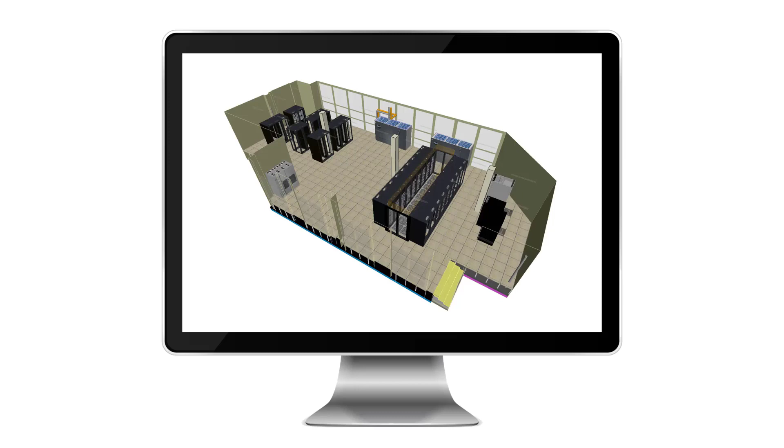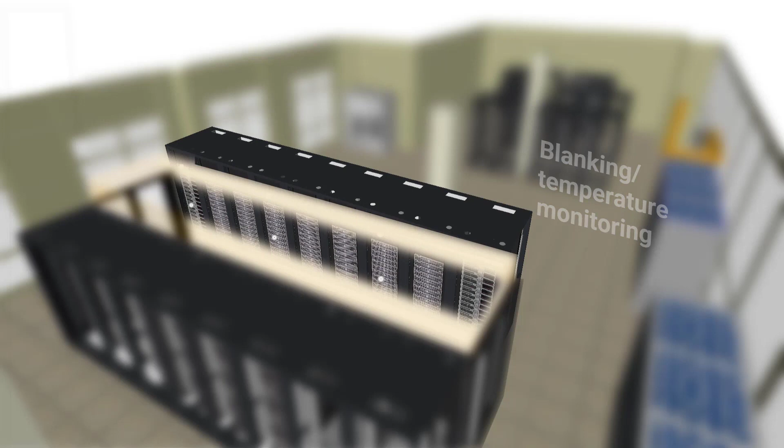This is a real data center from Binghamton University in New York that is part of a government and industry-funded research consortium called ES2. Future Facilities belongs to this consortium and has access to this data center to perform studies. It has a modern design with containment and monitoring and cooling system automation that was designed to maintain availability and efficient use of capacity resources at the same time.

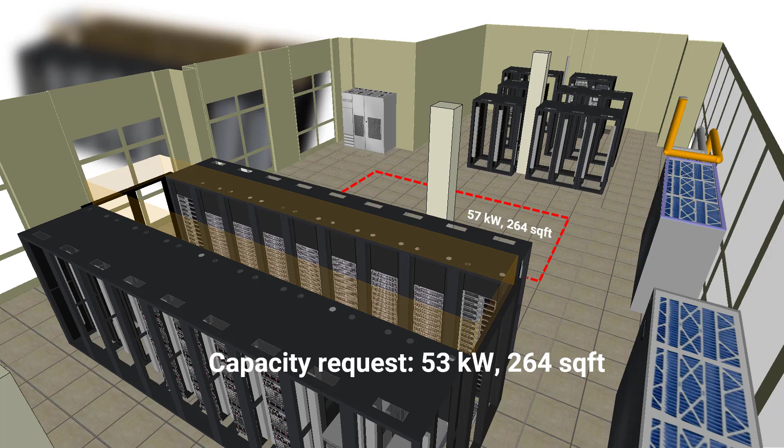In this example, a business unit wants to install a pod. The capacity requirements of this pod are within the data center's capacity ratings. On this basis, it was predicted that the pod could be installed without a problem, and the request was approved. After installation, 2 IT units in the adjacent aisle lost cooling capacity and set off their alarms. This behavioral change was overlooked by the prediction.

The methods used to predict performance missed this behavioral change, which led to an unexpected performance problem. The risk of a temperature-related failure increased even though the supply of cooling and airflow matched the demand from the IT equipment.

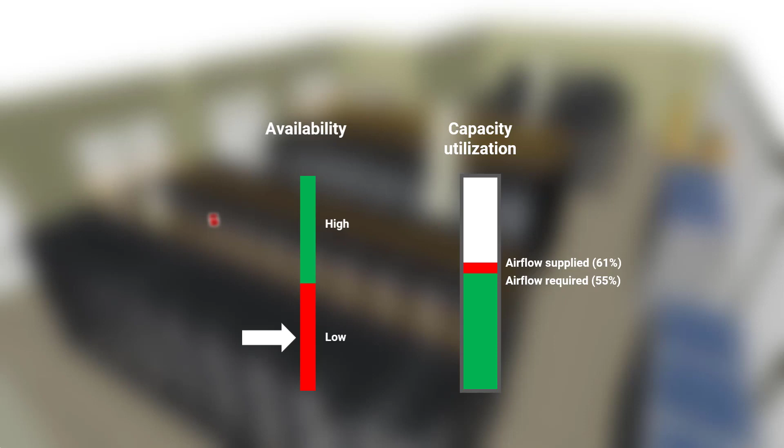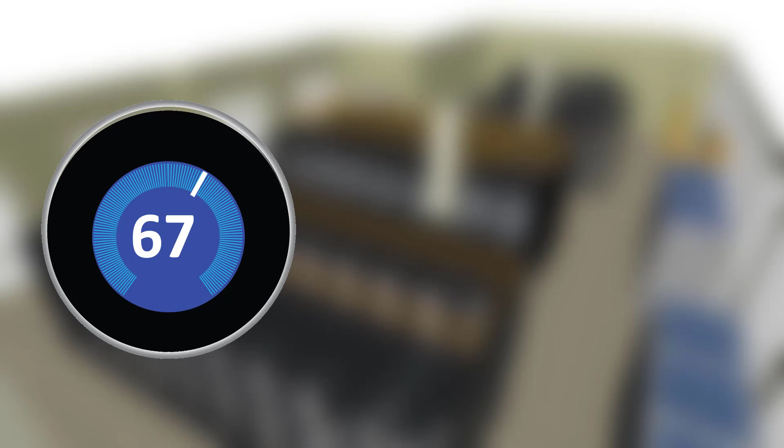The inability to predict data center behavior not only caused this problem, it also greatly limited the visibility of options to solve it. There was only one option the data center management team was certain would fix the problem, and this was to cool the whole room down until the alarm stopped.

So this approach eliminated the potential outage, but at the expense of capacity utilization. This configuration was using 95% of the available cooling to support an IT load that was only 55% of the available power. And this highlights the problem. Current tools and techniques lack the capabilities needed to account for data center behavior and performance.

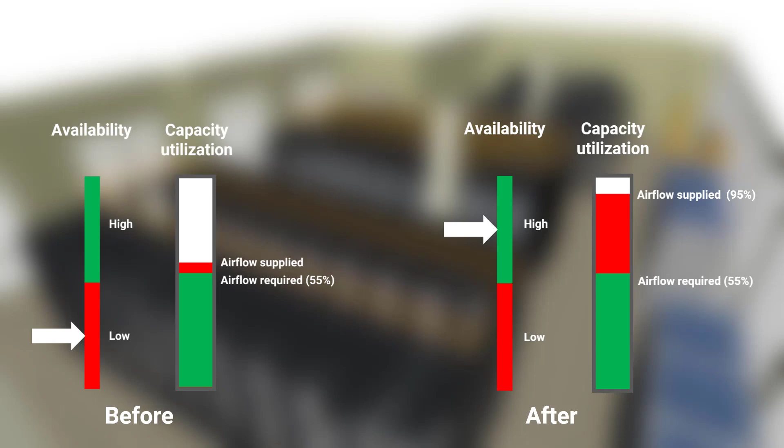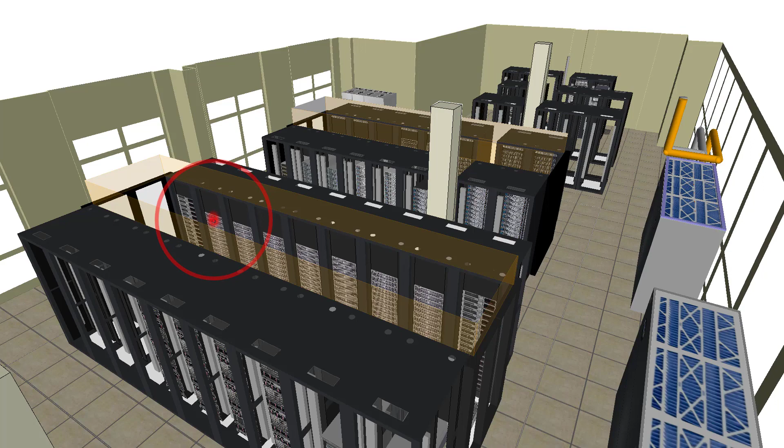Let's go back to the beginning and plan this change with a digital twin. First, let's return the cooling system to its original settings. This overheats the servers again. From this point, let's use Digital Twin to design a solution for this request. Digital Twin simulates the physical behavior that drives data center performance after the IT pod has been added. The simulation process returns a result in a few hours.

Here, we see that the Digital Twin simulation has identified the overheating servers. Without simulation, the only option for meeting the capacity needs of the servers was to provision more cooling capacity from the room. But with Digital Twin, the root cause is clear. This is a local airflow problem, not a room-level cooling problem. This problem can be solved without having to provision more cooling capacity. This can be seen more clearly by isolating the cabinets that are interacting with each other.

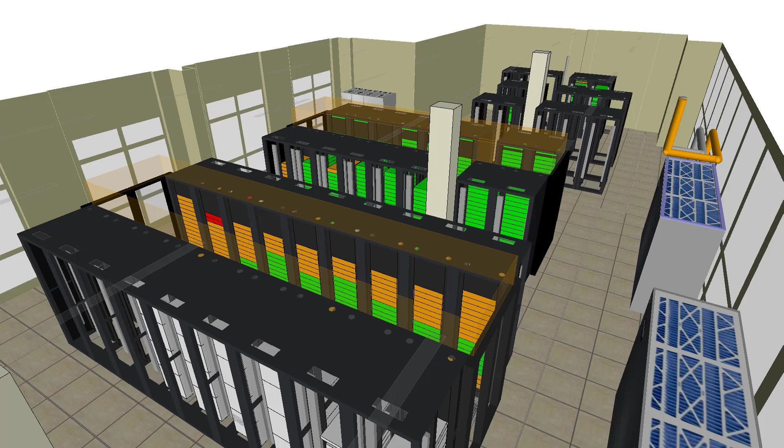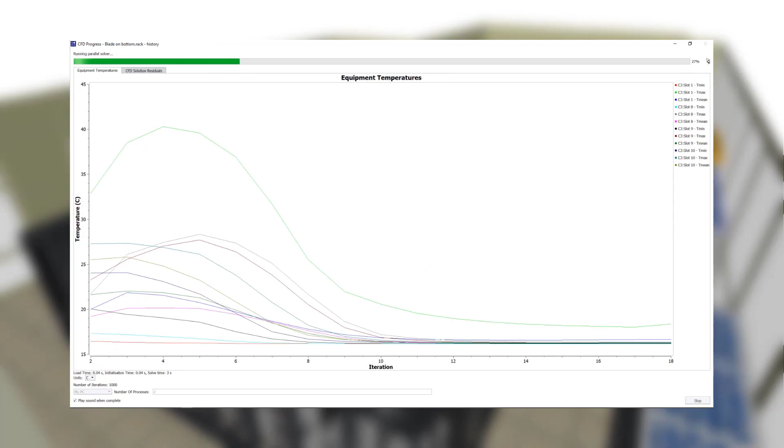From here, Digital Twin simulation capability was used to design a solution. Any fix that can be imagined can be simulated. With the airflow problem in mind, we will swap the location of the 10 kilowatt racks and run the simulation again. This solution looks promising. It solved the local availability problem and saved capacity for use in the future.

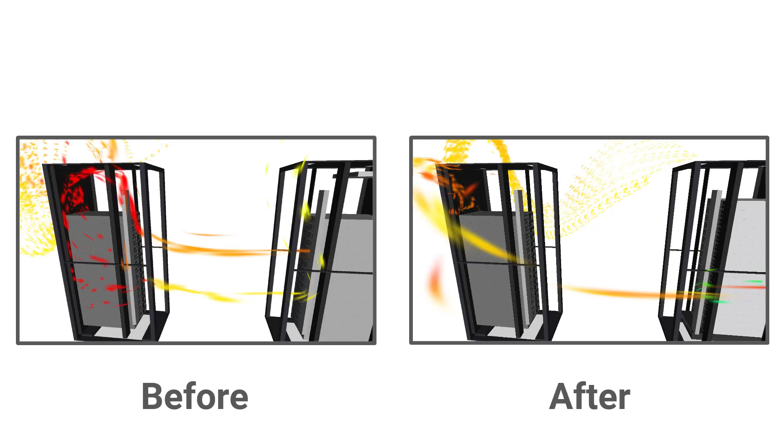And this can be seen clearly by comparing before and after. This configuration meets availability and decreases capacity resource utilization by 16%. And it also reduces chilled water system energy consumption by 5%.